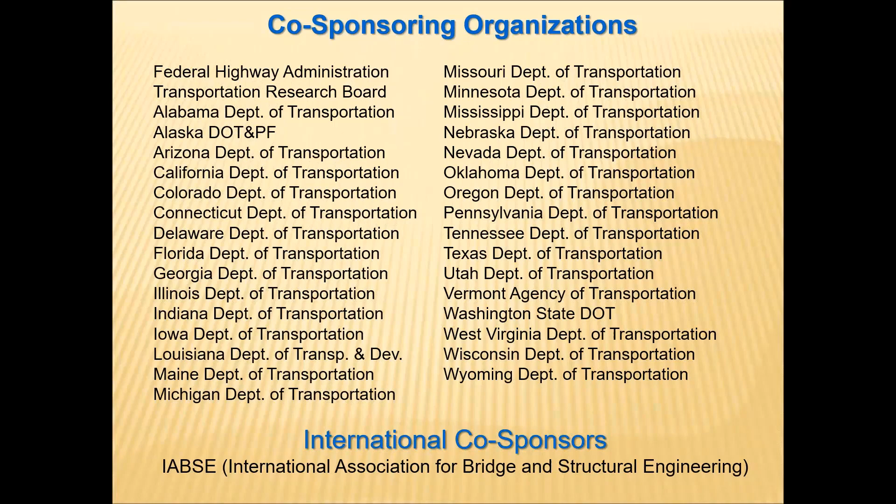This slide shows you the co-sponsoring state DOTs for the conference: 31 state DOTs, FHWA, TRB.

We also have IABSE as a co-sponsor of the conference. We are very delighted to tell you that we have two congressmen who are good friends of bridge engineering and very much involved with transportation, members of the committees on transportation. They're confirmed to be with us, sharing their thoughts and making some remarks during the conference.

The welcoming group also includes Carmen Swanwick, chair of the AASHTO COBS. We are also delighted to have a speaker from the US DOT, Firas Ibrahim, a very good bridge engineer himself, to provide us some of his thoughts on ABC and so on.

We also have several keynote talks with speakers from around the world to provide us with an opportunity to learn from the latest developments in ABC in other countries. You can go to our website and see their names, titles, and affiliations. We have speakers from Switzerland, Sweden, China, Germany, England, and Holland.

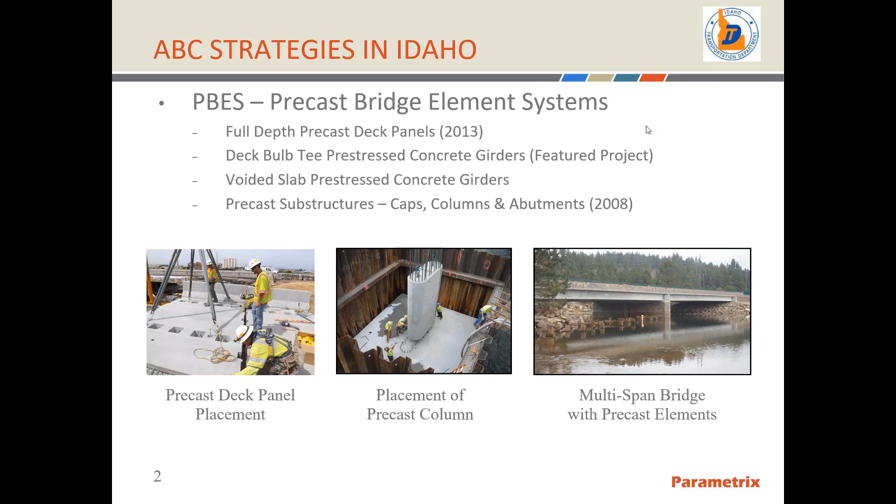In 2014, we did our first bridge slide. That was in a design-build contract, and it was followed up with another bridge slide in 2020 on I-84, which was a design-bid-build contract.

Also in 2013, we utilized full depth deck panels. And finally, we recently piloted a project for construction with the use of steel I-girders with cast in place concrete deck in segments, and those were cast off site, then craned into final position and connected with closure pours.

In summary, Idaho has been using ABC concepts for about 50 projects that we have had underway. And Idaho's use of ABC has been very positive, and we will continue to use ABC as a tool in our toolbox.

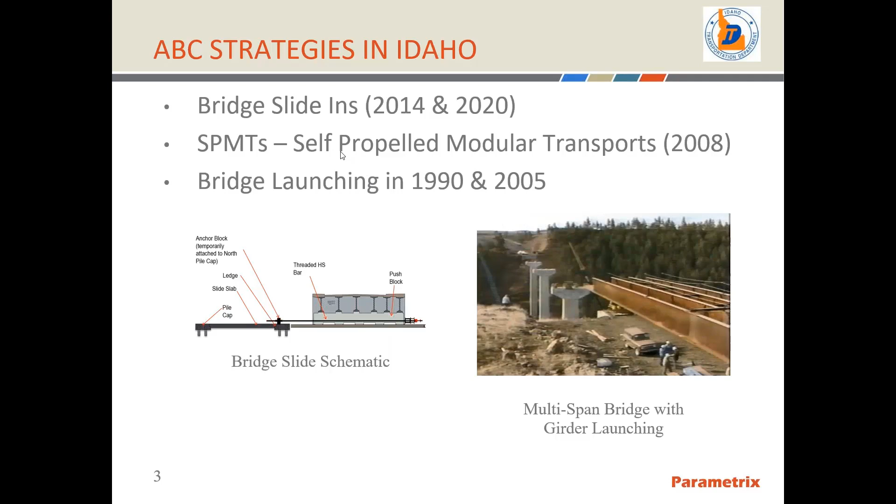Thank you very much, Matt. I'd also like to thank ABC and UTC for this opportunity to present our featured project for today. So today we're talking about the State Highway 51 over Snake River Bridge.

I'll give you a description of the project, design challenges, the solutions to those challenges, some details on the superstructure design and substructure design, and then also what everybody likes to see, the construction.

Contributors for the project included the people you see here. ITD did the majority of the roadway civil design, and also did the early on design, the TS&L, to select the type size bridge replacement that we're going to talk about today. ITD hired Parametrix after they did the TS&L to complete the design and take it all the way through PS&E.

American Geotechnics was the geotechnical engineer providing the foundation design. Forrester and Associates provided hydraulic and scour design. The contractor was Cannon Builders. The precaster was Forterra.

Lafarge Ductal provided the UHPC for the connections. Nucor and Skyline provided the steel pipe piles that we'll be talking about today. HLE was the contractor's engineer who did all of the construction engineering. Western States Rebar provided reinforcement, and of course FlexiFloat, which you'll see their product being used here in the presentation for the barge that was used during construction.

The project was the typical design bid build project with 6 bidders. The low bid came in around 6.8 million, with the high bid coming in around 8.8 million. The contract was set up to have 299 calendar days to complete the work, with liquidated damages of 4,100 per day.

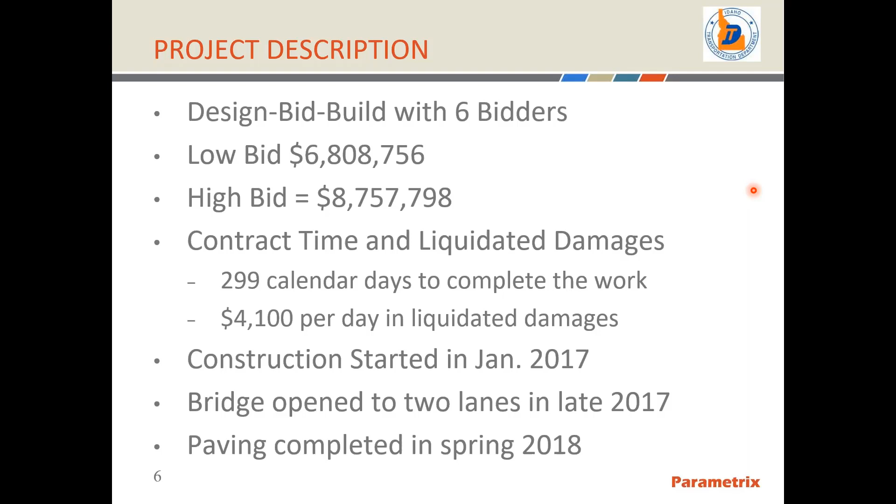Construction started in early January 2017. The bridge was opened to 2 lanes in late 2017, and paving was completed in spring of 2018.

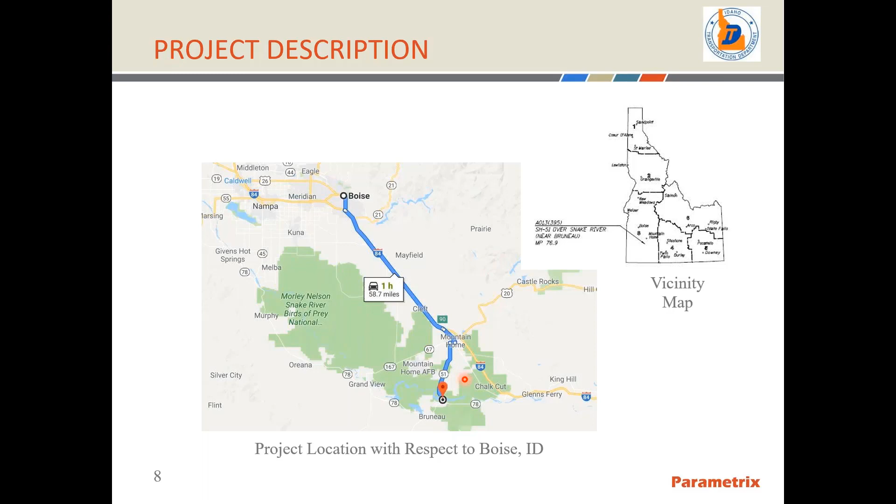The project is located in Idaho. Here's a map of the US, and Idaho is in the Great Northwest. More specifically, we're talking about the southwest corner of Idaho here. From Boise, it's an hour southeast to the project site, heading south on I-84, and then when you get to Mountain Home, you take another south turn on State Highway 51, and eventually you'll get to the project site.

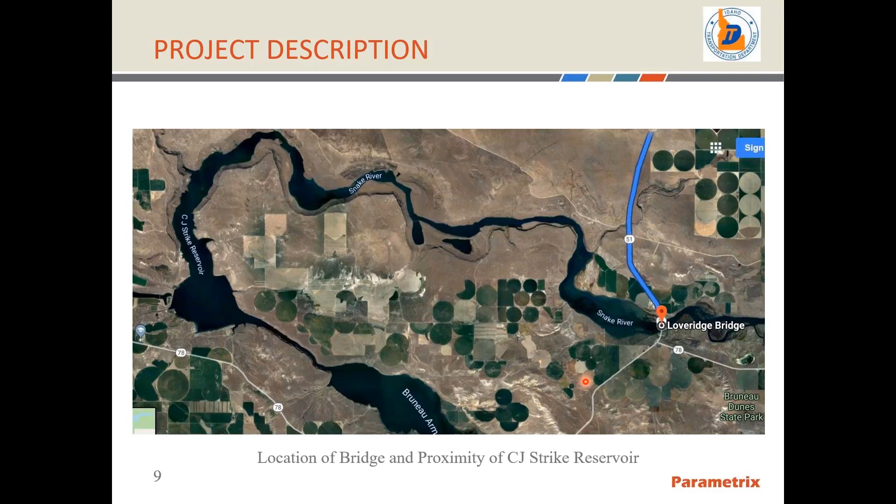In this photo, you can see State Highway 51 runs north-south across the river. This is the Snake River. There's a reservoir here, CJ Strike Reservoir, with the dam right here. The bridge is actually just in the eastern limits of the backwater from the reservoir. Also nearby is the Bruneau Dunes State Park, a great place for recreational people who like to play in dunes. And then, as you can see, lots of agriculture in the area. So State Highway 51 plays a valuable link, especially for agriculture, a lot of the product that needs to get to market.

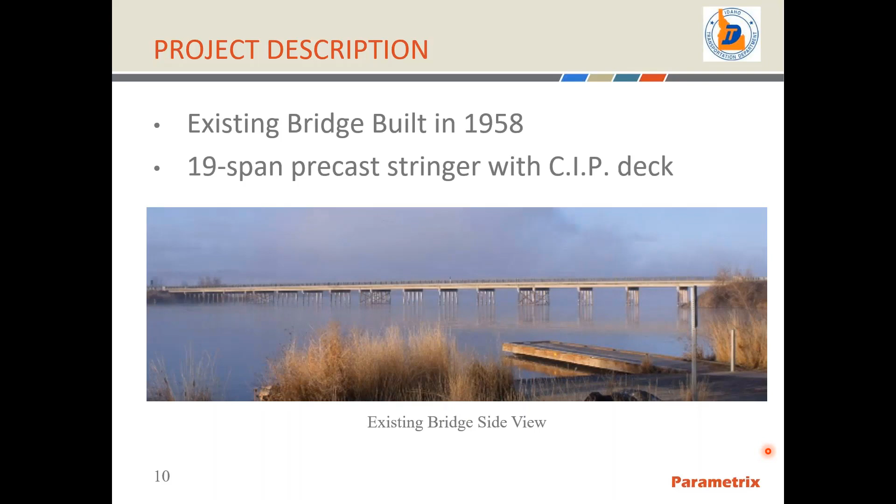The existing bridge was built in 1958. It's a 19-span precast stringer with cast-in-place deck bridge. The substructure consisted of pile bent substructure type, so 4 piles per bent with a cast-in-place cap. And then the deck itself was a two-lane bridge with minimal shoulders and of course substandard rails by today's standards.

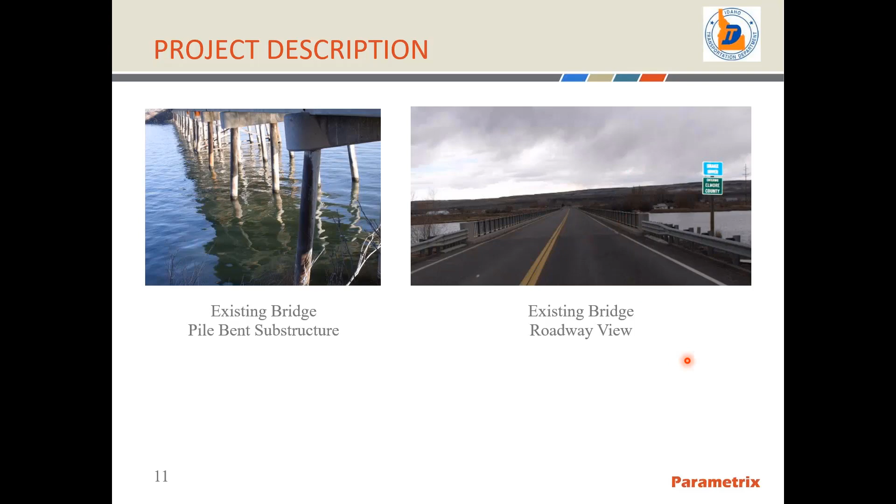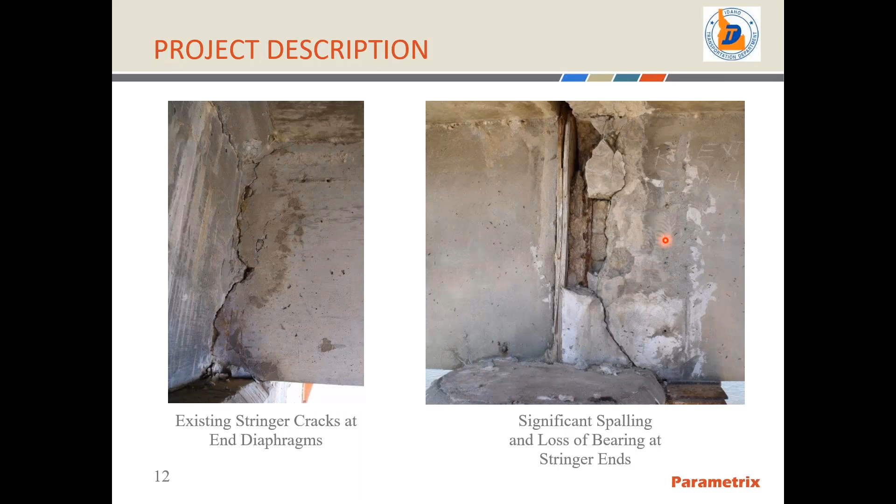Lots of deterioration started to occur over time, including significant spalling at the ends, which was opening up opportunities for corrosion for the reinforcement inside the members. ITD throughout the years had been working to extend the service life of the bridge by installing these steel brackets to the face of the pile caps.

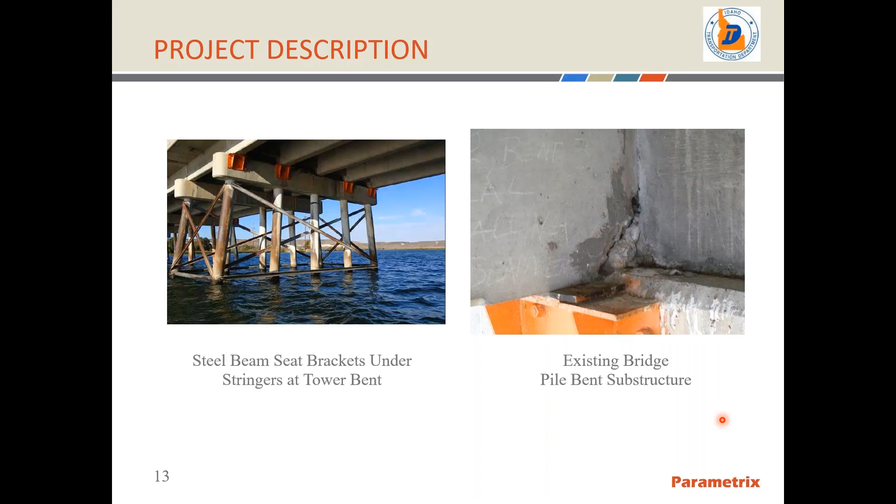On the left-hand side, you can see a location on the existing bridge where there's a tower bent, two bents side by side, and the steel brackets that were being installed to help extend the service life of the bridge. Recent inspections had identified that even the steel brackets were starting to show signs of significant deformation, so ITD made the decision that it was time to go ahead and replace the bridge.

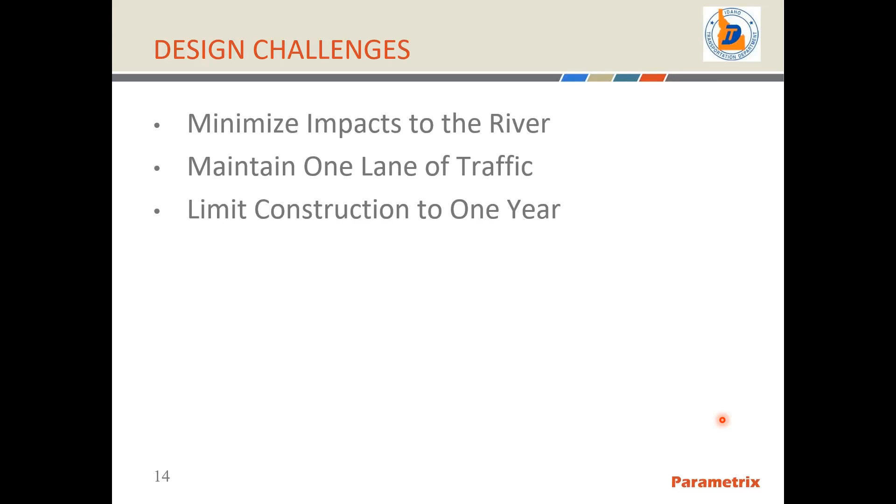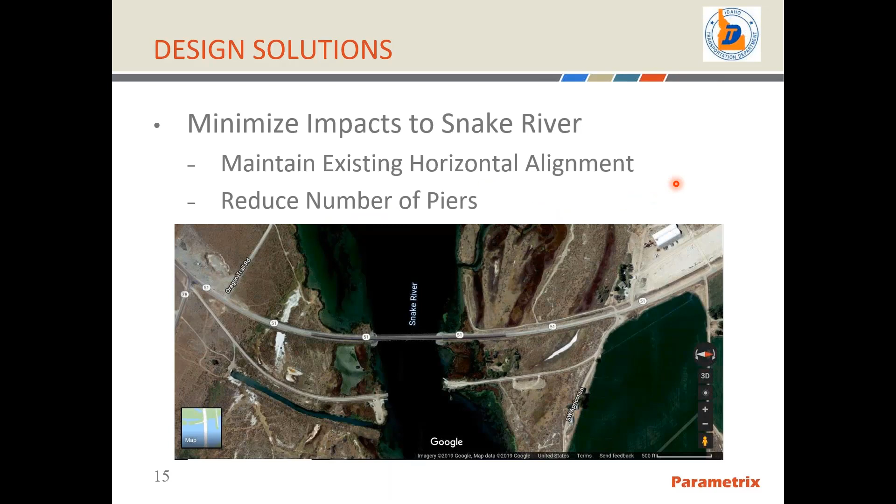The decision was made early on to avoid realigning State Highway 51 and instead utilize stage construction in order to maintain the same horizontal alignment. We also wanted to reduce the number of piers that were going to be installed in the river.

Traffic control was maintained with temporary signals at each end - here's a picture of the temporary signals we used. The traffic volume is not very high, which is why these single-lane closures work like this. The one-directional ADT was 575 with only about 6.7% trucks.

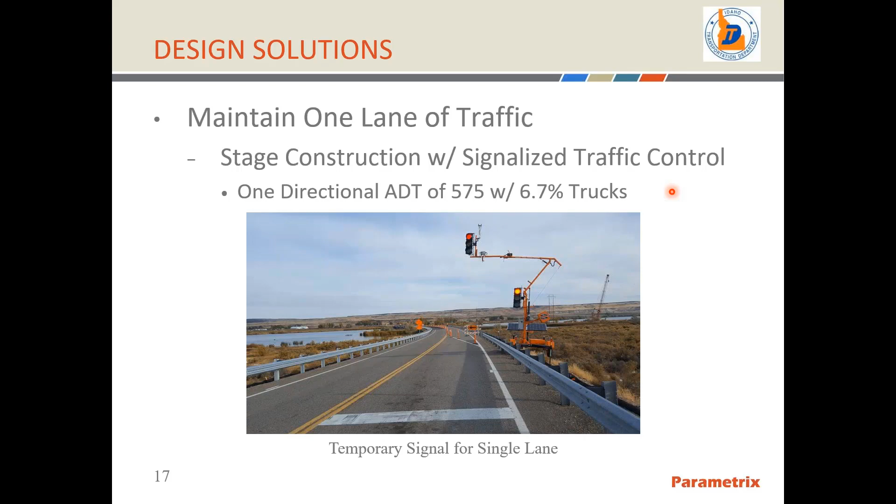To limit construction to a single year, we looked at many options, but settled on utilizing deck bulb T-girders with ultra high performance concrete, providing an asphalt overlay with spray-applied waterproofing membrane, and for the rail, using a two-tube curb mount rail.

In this picture you can see the deck bulb T's, which were connected with ultra high performance concrete between each girder. The overlay shown here varied from 7 inches at the abutments and piers to just a little over 2 inches minimum at midspan. And here's the two-tube curb mount rail.

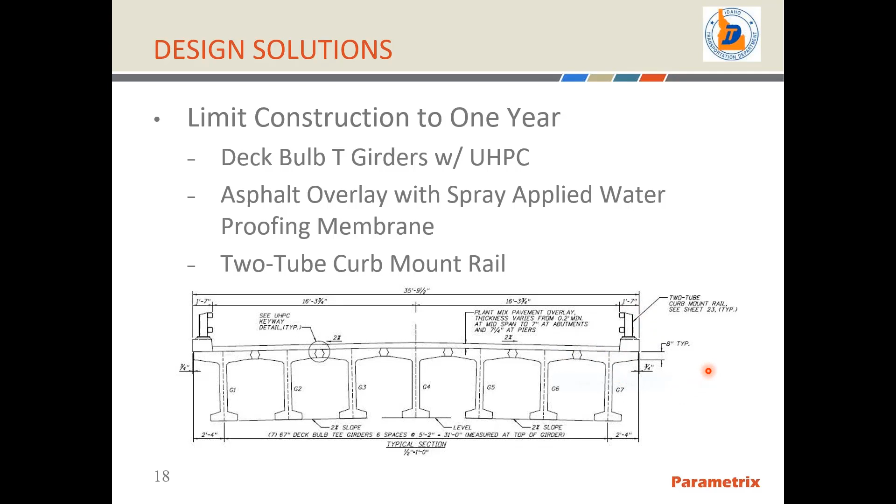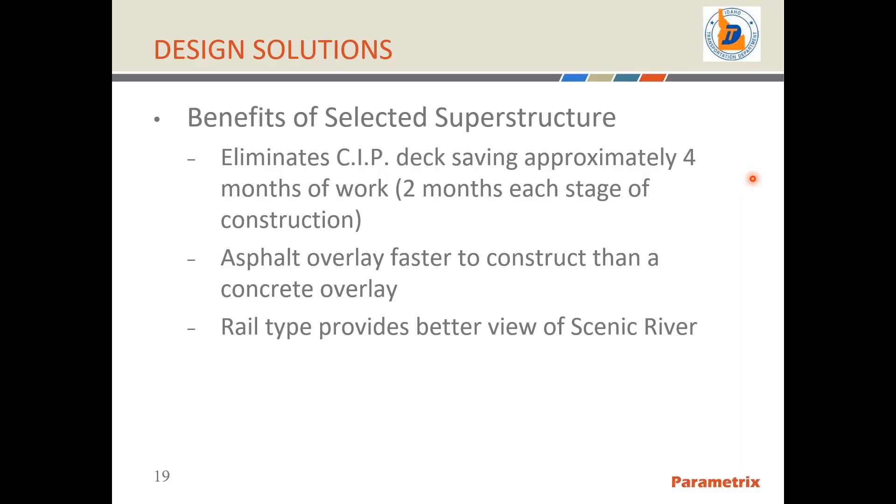Benefits of the selected superstructure were that it eliminated the cast-in-place deck, saving approximately 4 months of work, figuring about 2 months for each stage of construction. The asphalt overlay was also faster to construct than a concrete overlay, and the rail type provides a better view of the scenic river.

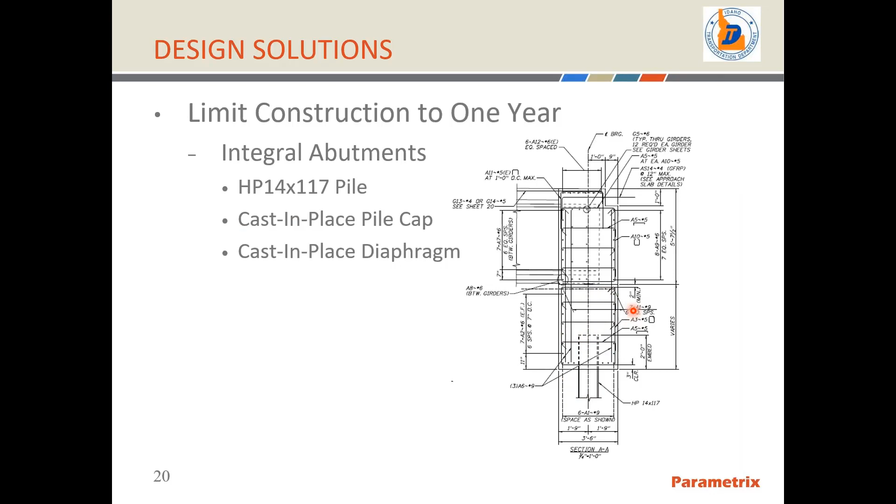Focusing on the substructure and what we could do to help expedite construction - this is a fairly long bridge, so we had to do extensive calculations to make sure integral abutments were appropriate. It was determined they are acceptable for the bridge length, founded on a single row of steel H piles with a cast-in-place pile cap, and the end diaphragm here.

With regard to the piers in the water, we elected to use a cast-in-place cap beam founded on top of pipe piles - 4 piles, 36 inches in diameter, with a 1-inch wall.

Benefits of the selected substructure included a significant reduction in in-water work time. We didn't have coffer dams or drilled shafts, no pile groups with a cast-in-place pile cap to construct, and no cast-in-place or precast columns to construct. It also reduced environmental impacts to the river, had higher reliability for the capacity of steel piles with the use of pile dynamic testing, and ultimately we provided a jointless bridge deck, reducing maintenance costs in the long run.

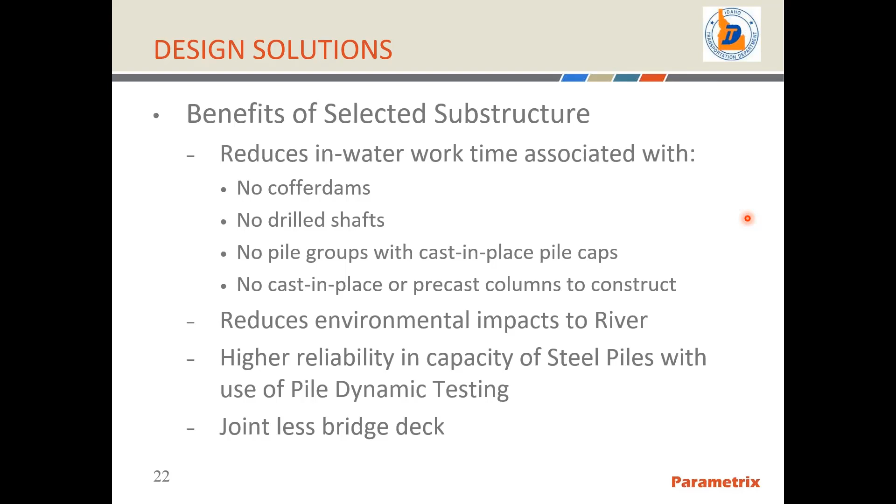More specifically about the superstructure design, the precast girders themselves were connected with ultra high performance concrete. Most of us listening to these webinars have heard about ultra high performance concrete before, but there may be some new to bridge engineering who haven't, so I'll talk a little bit about it. All the design was completed using this tech note, Design and Construction of Field Cast Ultra High Performance Concrete Connections.

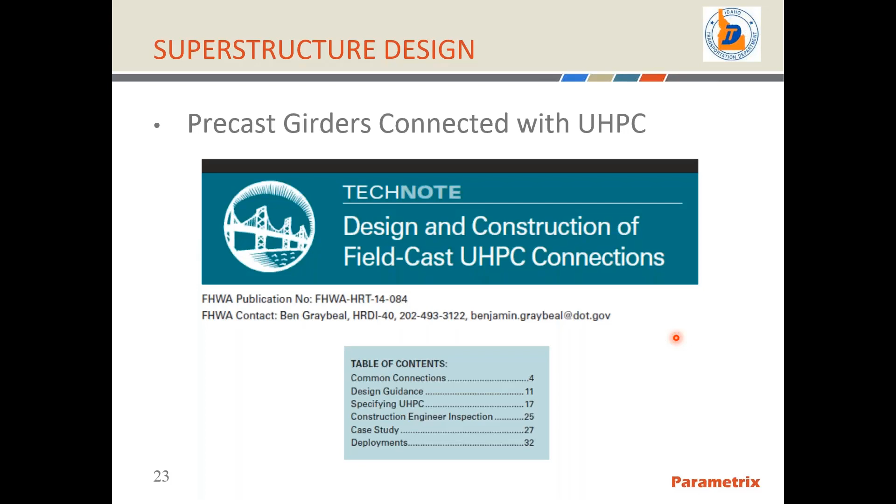It's an FHWA publication, the publication number is there for you, and FHWA's contact is Ben Graybeal, who really authored this publication. He's a great resource if anybody's interested in learning more about it. I highly recommend you pick up this tech note and read through it, and if you've got questions, give Ben a call. I personally called him twice during the design of this project just to get confirmation of the information and make sure I was applying things correctly.

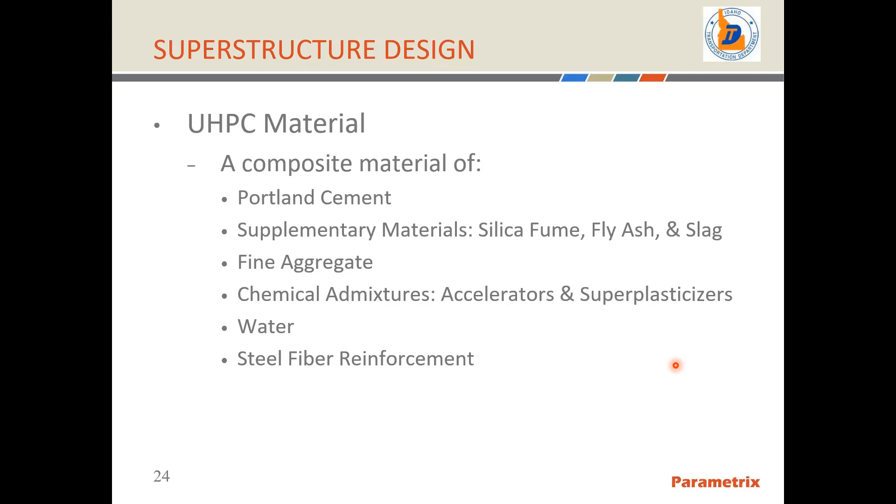Ultra high performance concrete is really a composite material. It includes Portland cement and supplementary materials like silica fume, fly ash, or slag. It uses fine aggregate, not coarse aggregate, and has chemical admixtures like accelerators and superplasticizers. Of course it uses water, and another key ingredient is the steel fiber reinforcement, typically about 2% by volume, consisting of little half-inch steel fibers that are about 8/1000ths of an inch in diameter.

So why did we elect to use ultra high performance concrete for the girder flange connection on this project? Well, it has a high tensile strength. It's self-consolidating, so it's easy to flow into the keyways and around the reinforcement. It bonds well to the precast surfaces when prepped accordingly. It has high durability and low porosity, which is good for our freeze-thaw conditions. And it has a short development and lap splice length, which is really beneficial.

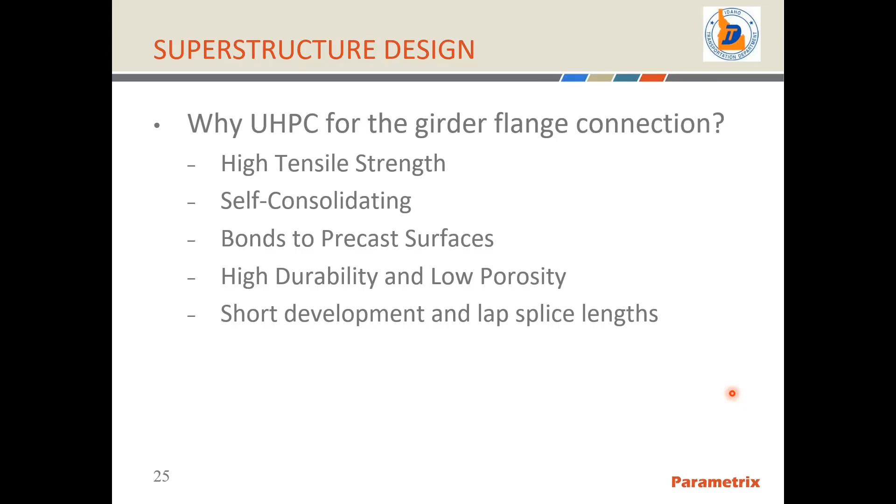In particular, the reinforcement lap splice information for lap splice and development length in ultra high performance concrete is provided here. Depending on your cover requirements, your development length is anywhere between 8 and 10 bar diameters. The more unusual piece, I think, when people first start working with this, is that the lap splice length is only 75% of the bar development length. For us in bridge engineering, or concrete design generally, that's unusual to hear, that your lap splice length is shorter than your development length. What we typically see using regular reinforcement and regular concrete is our lap splice length is about 30% longer than our development length in today's codes.

This was one area where I actually contacted Ben Graybeal to ask for clarification, to make sure I was understanding the information correctly in the tech note. Ben assured me I was interpreting it correctly, that there's been plenty of research done to show that the bars, when tested, actually break inside the precast and not inside the ultra high performance concrete. He's got lots of data to support these recommendations, so we followed them.

For our particular project, the way we connected our girders together at the keyways, we used a 6-inch wide keyway that accommodated a 4-inch non-contact lap splice. All of the reinforcement in the flange was epoxy coated reinforcement. The top mat were number 5 bars and the bottom mat were number 4 bars.

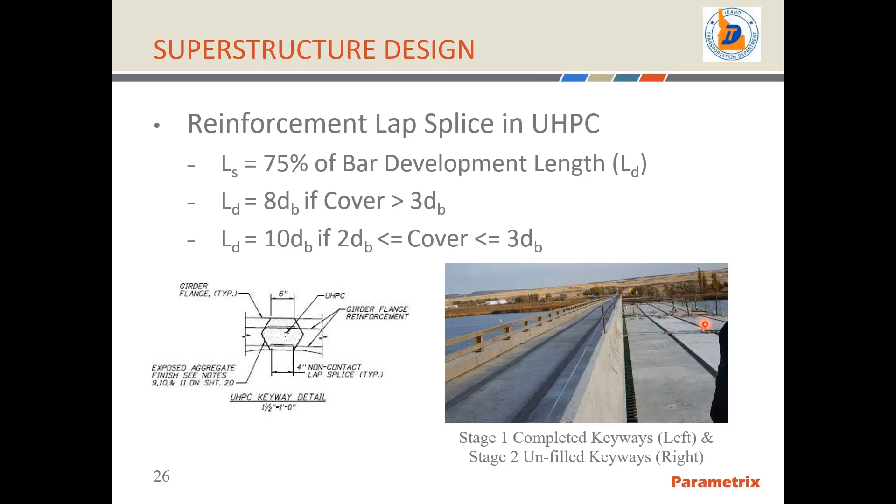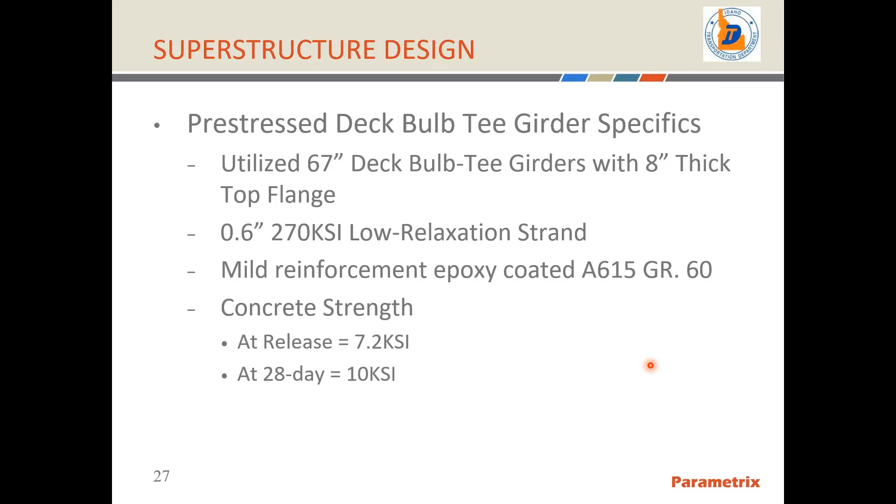More specifically about the pre-stressed deck bulb T-girder design, we utilized 67-inch deep deck bulb T-girders with an 8-inch thick top flange. It used 6/10, 270 KSI low relaxation strand. All other reinforcement was A615 grade 60, and the concrete at release was 7.2 KSI, and at 28 days 10 KSI. The girders were designed as simple span beams with mild reinforcement in the top flange to control cracking at the piers. Dead loads were applied prior to the UHPC keyways, distributed based on tributary area to the girders—basically anything that would be on a conventional non-composite or composite deck girder system; anything non-composite went tributary to the girders.

Similarly, we treated all loads that were applied after the UHPC keyway was installed and cured. We distributed all dead loads equally to the girders.

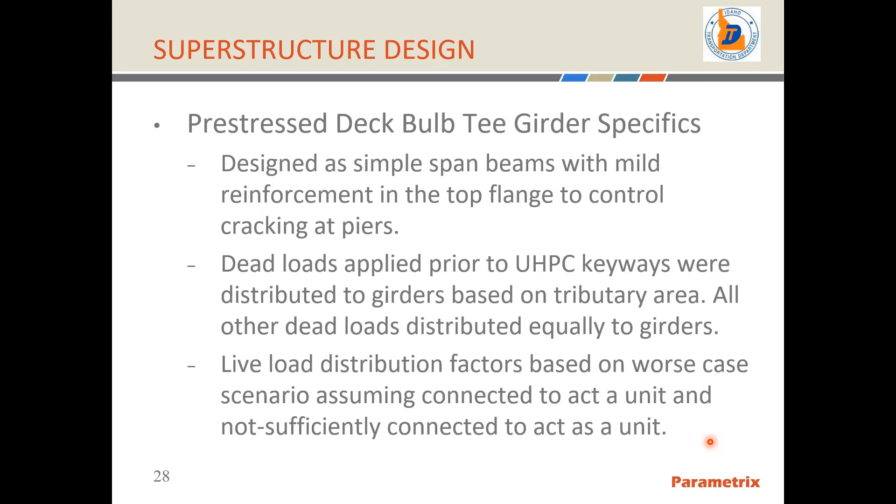Our live load distribution factors, because this is new technology being used, aren't clearly or specifically addressed in the AASHTO LRFD bridge design specifications at this time on what distribution factor to use. So we elected to use the worst case scenario, assuming the girders are connected to act as a unit, and also not sufficiently connected to act as a unit, so we could bracket the range of possibility and make sure we're not light anywhere.

More specifically about the connection over the piers, the reinforcement was really designed to control cracking over the piers. Our top flange reinforcement consisted of number 7s in the top and bottom mat of the girder. These number 7s from the left and right side of the pier were staggered to avoid each other and have a non-contact lap splice right over the pier.

The reinforcement was designed to control cracking over the pier, so it was checked for the service 1 limit state and not the strength limit state. The girders were designed as simply supported for the strength limit state and service limit state, but also checked at the service limit state to control cracking over the pier.

Furthermore, to connect the superstructure to the substructure, we provided dowels that ran down the centerline of the pier, connecting these two along with a keyway - a pretty common detail used in Idaho.

Location of the bents was also a critical feature for this. The existing bridge was composed of 19 spans, but 3 of those spans are really short spans in these locations that actually produce what's called a tower bent - at least that's how it's identified in the existing plans.

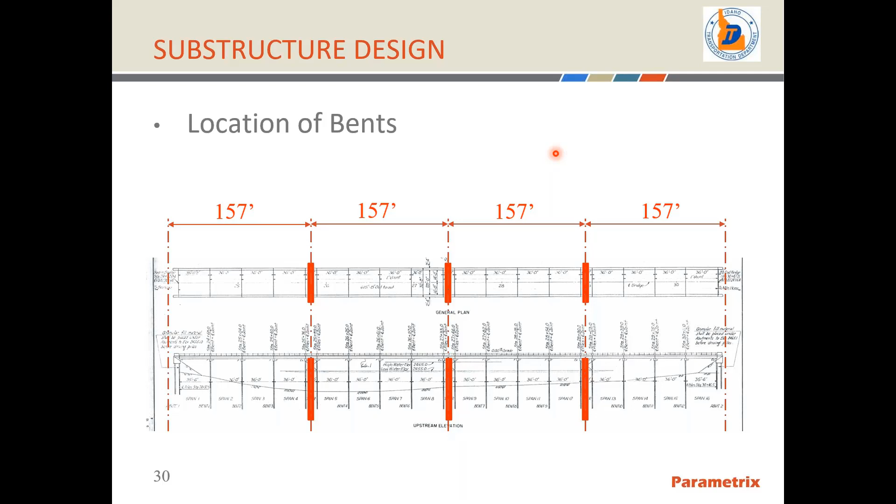So the tower bent with those short spans became an ideal location to place our new piers, shown in red. The piers were spaced right between those tower bents, with the thought that the contractor could use the existing bridge to mobilize out on, remove the short span, drive his pile, and then work back off the bridge deck. And that's exactly what the contractor elected to do during construction.

Another benefit of selecting this location and making use of the tower bents is the contractor was able to use a steel template to ensure correct alignment for his piles while driving through this water column and down into the stream bed mud. The contractor made great use of the existing bridge to facilitate his tolerances and placement of the piles.

More about the pier bent piles themselves - for the foundation, it was decided, working with American Geotechnics, the geotechnical engineer, to use 36-inch pipe piles. It's really called a composite pile in the geotechnical world, at least what I learned for the first time on this project, because it's driven as an open-ended pile in the beginning.

So the pile at the tip has no closure plate. It was driven open-ended for the first 55 or 60 feet, depending on the pier, and then a closure plate was installed in the pile. This closure plate, once in contact with the pile, forced a situation where the pile was plugged and you had an end-bearing pile.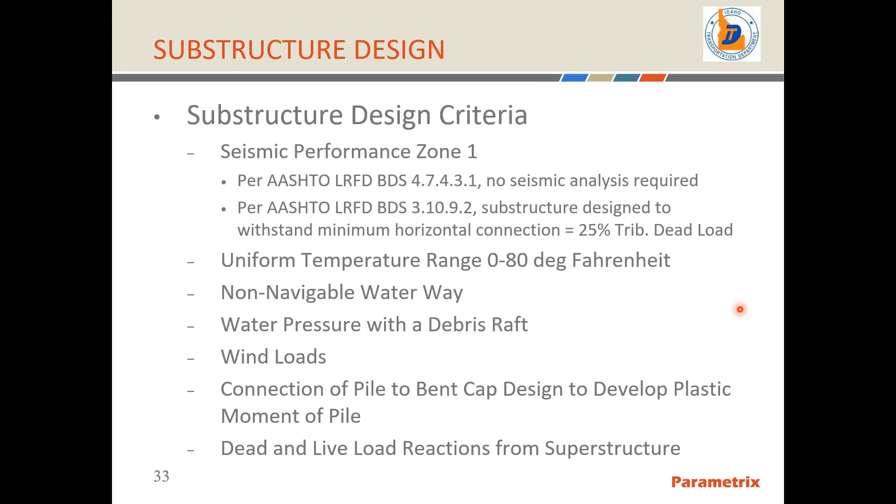So in order to get full plastic moment capacity of that pile inside our bent cap, we designed a very robust group of reinforcement that confined the concrete around the pile. What you see in these red lines are actually U-shaped bars crisscrossing across the pile in opposite directions. And these green shaped bars, kind of like a top hat bar, help to transfer all axial load into the cap beam.

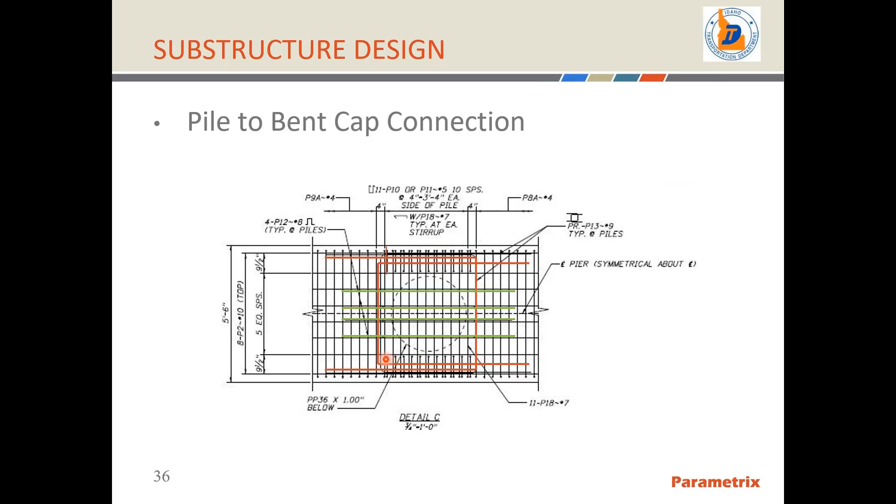Another view here to help see it: in this section on the right hand side, you can see our red bars, which I'm highlighting in red. These were again those opposing U-shaped bars, and we also had the additional number 8 top hat bars, as I like to refer to them. In plan view, to help see the whole picture, here are those U bars tied in, and of course the top hat bars right there.

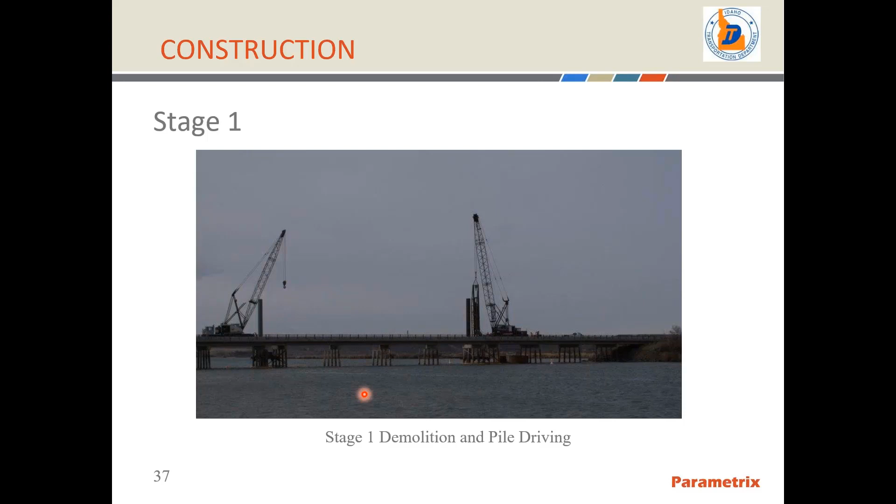Beyond design, let's talk a little about the construction. The contractor started with stage 1 construction, demoing out the short tower span, and then demoing out part of the bridge itself. He worked with 2 cranes, as you can see in this picture. On the right hand side, the contractor's crane is mobilized with a hammer, driving pile. On the left hand side, you can see a pile sticking up in the air, waiting to be driven down. The contractor worked back and forth this way on the existing bridge while traffic was on the other side during stage 1.

Here's another picture of the pile driving that was done by the contractor. As you can see here, this beam has a steel bracket. As we mentioned, the bridge was being replaced because there was some deterioration at the ends of the beams that were causing issues with bearing.

As part of the construction, we required the contractor, if he mobilized construction equipment out there, to provide design calculations showing the beam can handle it with the existing brackets that were supporting the beams, since construction loads are often heavier than highway loads.

During design, we did a load rating of the bridge to verify that the stage 1 situation, with reduced number of stringers, was satisfied with the additional weight of the temporary barrier that was installed. The load rating was acceptable for highway loads, but for construction loads being much higher, it was not acceptable.

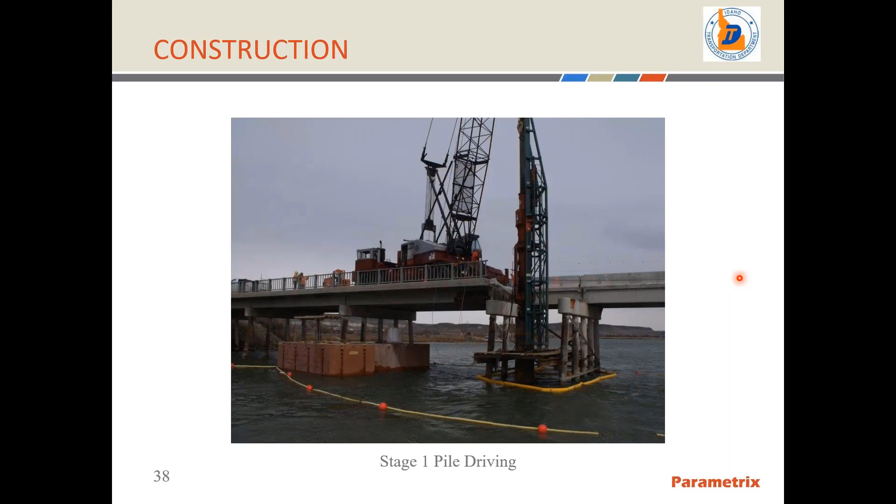So the contractor had to do extra work to design this little bracket, and he applied it anywhere there were signs of deterioration on the bridge where these brackets were installed by ITD to help extend the service life of the bridge. It worked very well, and it made it possible for the contractor to use the existing bridge for construction while driving these piles.

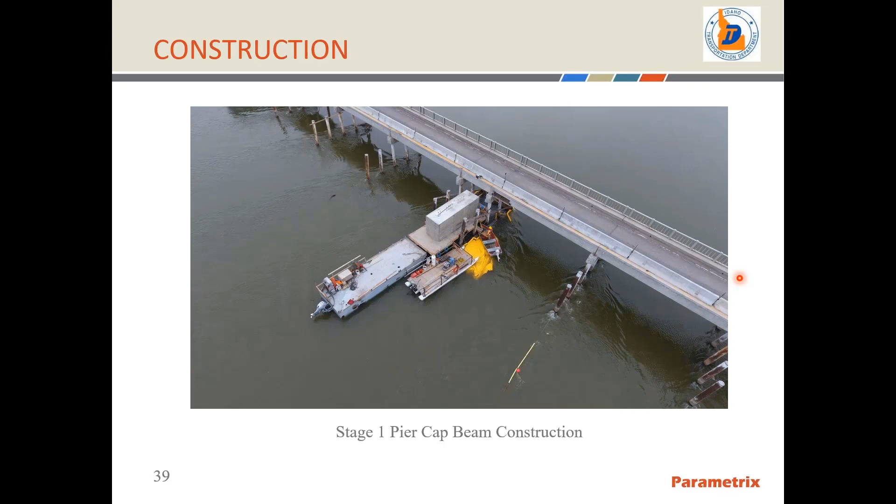Here's a picture again of stage 1 construction showing the cast-in-place cap complete after the pile driving was done. You can see dowels sticking out to make the connection to the superstructure.

In this picture, after the pier caps are done and the abutment was complete at the ends, the contractor mobilized his crane out onto a barge. In fact, all construction was performed for this bridge working off of barges. No temporary structures, like a temporary platform with piles driven into the river, were utilized. All work was performed off of barges.

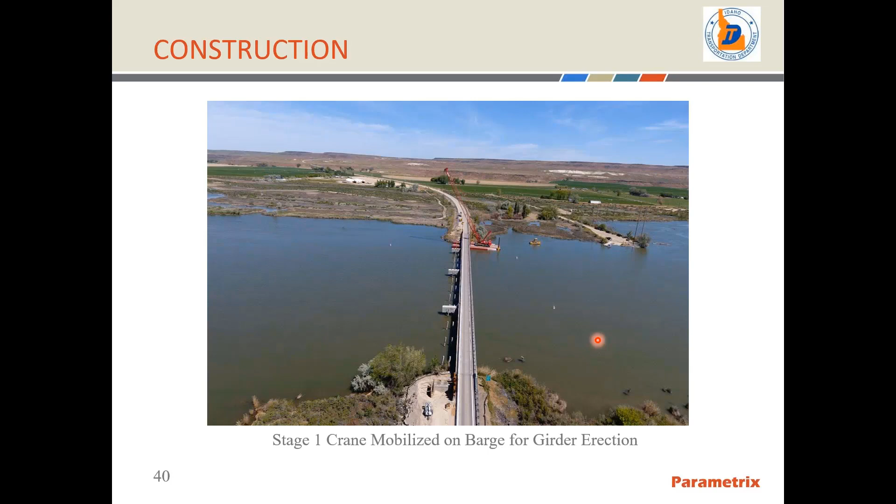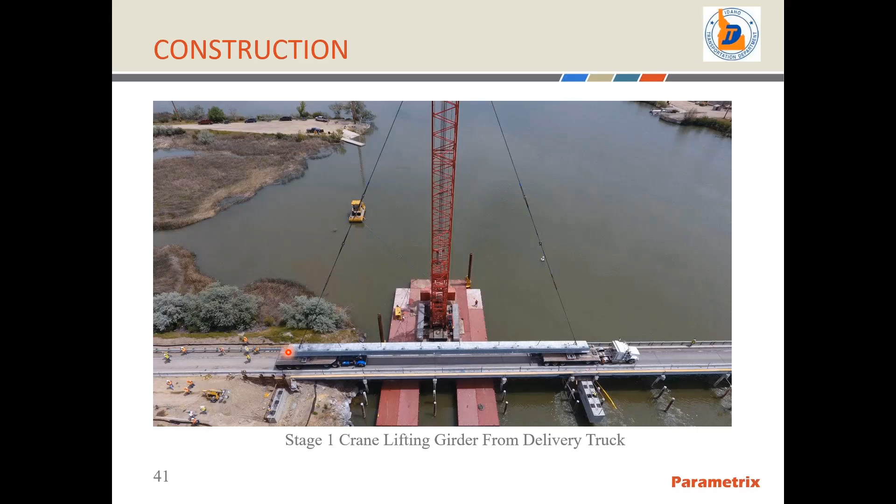So the contractor, when ready to erect his girders, mobilized his crane in, as you see here in the picture. Then the truck comes in. He connects his crane leads up to the pick points on the girder, using a single crane to pick this large girder, and then proceeds with the girder erection as you see here.

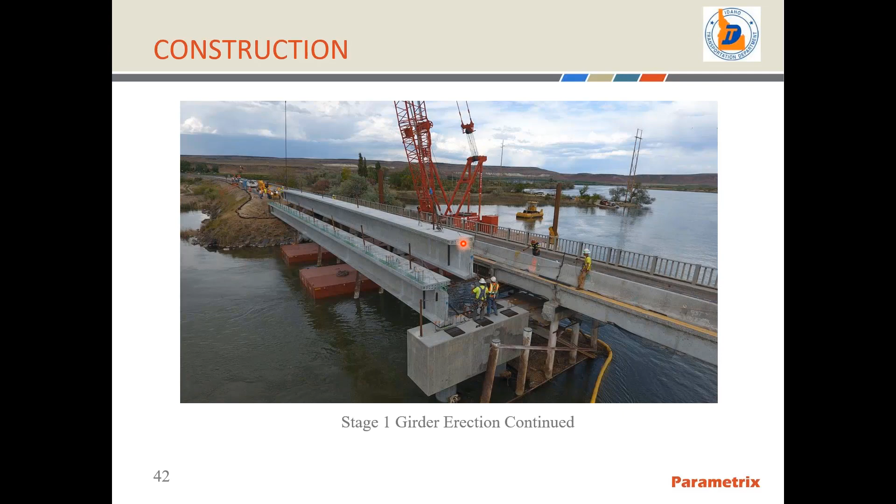So what you see here is stage 1. The first girder is erected, the exterior girder. Now this first interior girder is coming to land on the bearing pad.

Once the girders were erected, the contractor was ready to start installing the ultra high performance concrete. Here's a picture of the equipment that was used to place the UHPC. All batching of this material was done on site.

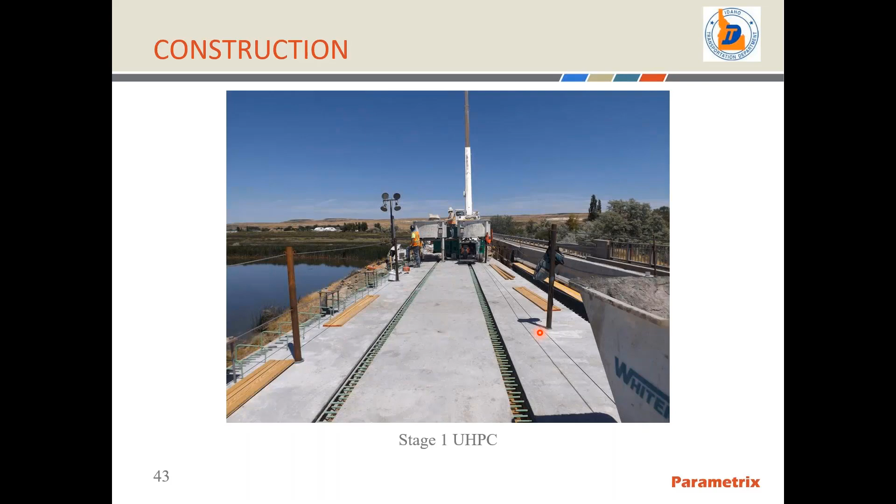Here's some more pictures about the UHPC placement. In order to place this material, the contractor has to form on the bottom side, but also has to put a form on the top side, because this material is so flowable with the superplasticizers and additives in it that once it starts flowing, it flows really well. In fact, it actually flows up and out of the form, especially in low spots.

Pre-stressed girders tend to camber up, so the ends of the girders would be the low spots, and this material really would start to flow out of it. Plus, the specifications for the project required that the UHPC flow about a quarter of an inch up out of the joint, and then the contractor has to grind the joint flush with the deck after it's cured.

In this picture, you see the crews installing the forms across the top. And in this picture, you can see the material flowing as it's being placed.

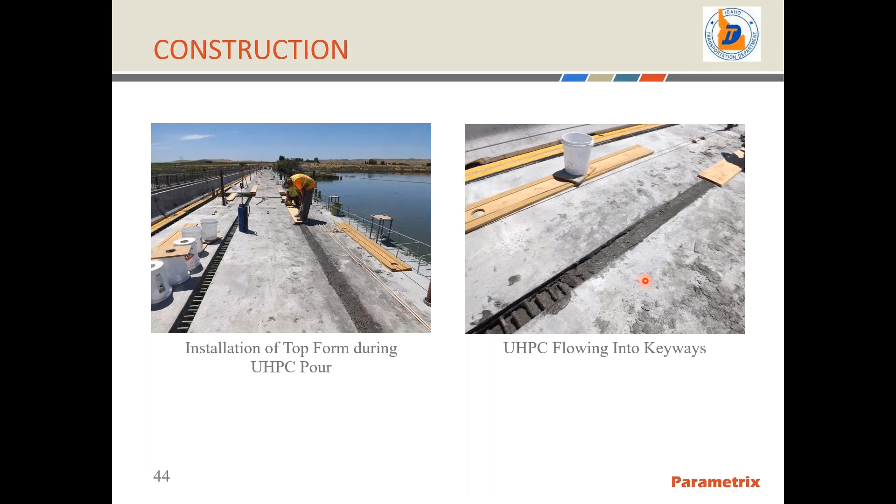The apparatus used for pouring the UHPC was pretty simple. They referred to it as the bucket on site, so it was pretty easy to place the material. They mix it and place it in here, making sure it flows directly into the keyway. You can also see in the picture, again, the epoxy coated reinforcement.

The prepped keyway might be hard to see, but there is an exposed aggregate finish on the keyway, and the material's flowing. They need to get some more in here soon, though.

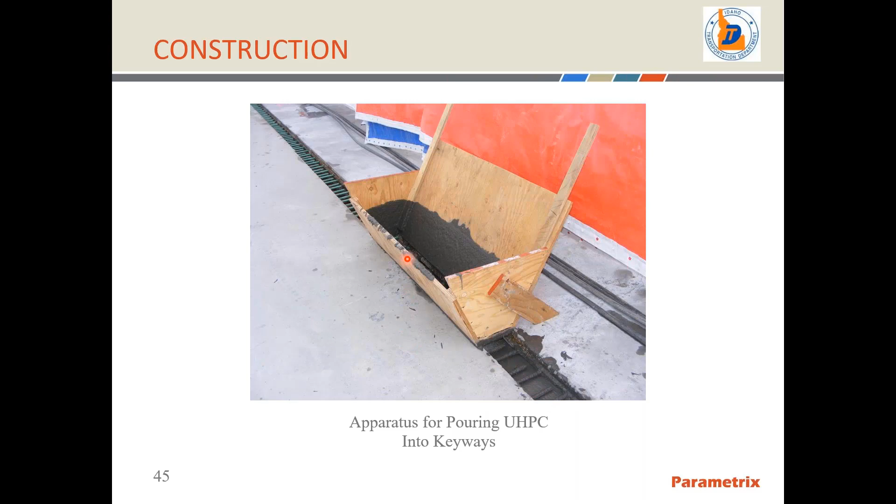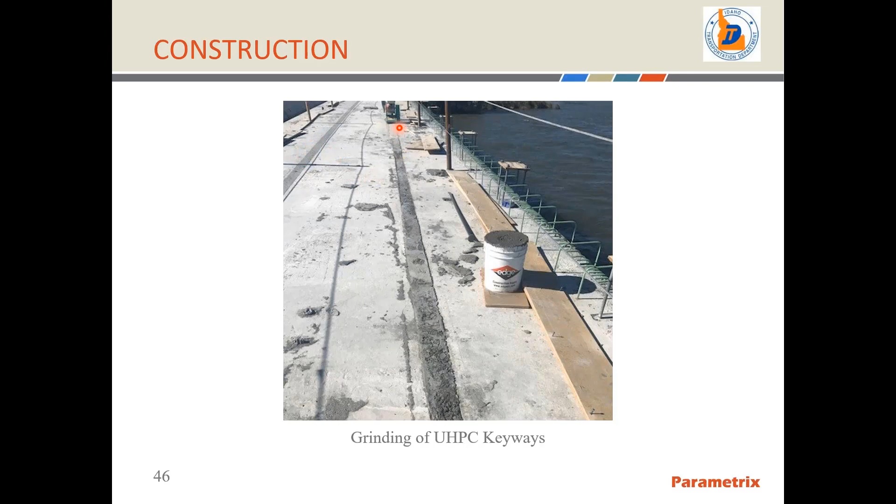After the keyways were poured, the contractor then had to grind the keyways, as I mentioned before. So what you see here on the left-hand side is this keyway has already been ground flush with the adjacent girder flanges, and this keyway grinding is taking place as we see right here. So stage 1 is complete in this picture.

On the left-hand side, there's the 2-tube curb mount rail, the keyways, and the girders and the temporary barrier. On the right-hand side in the picture, you see stage 2 construction in progress. The contractor's got his dual cranes out there, and equipment out there.

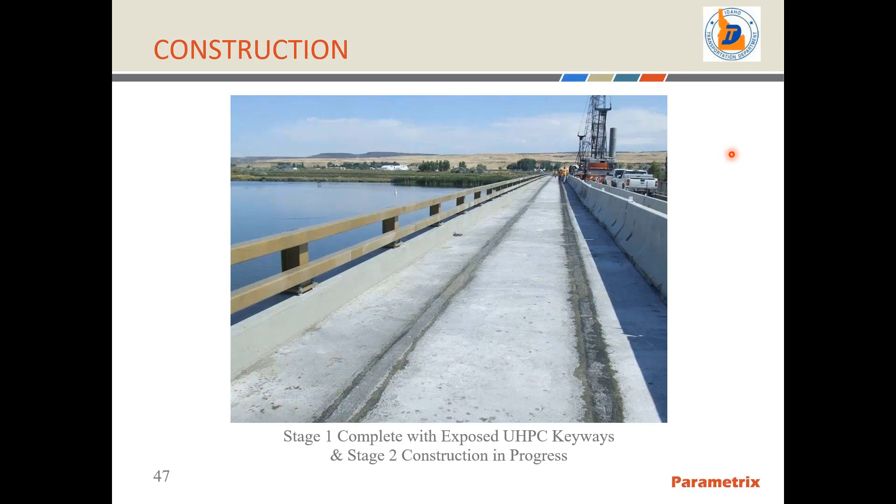You can see a pile up in the air right here as he's working to drive his pile and demo out the bridge, working back from center. Here's a picture of stage 2 demolition, the contractor's crane on the existing bridge picking the rail right now.

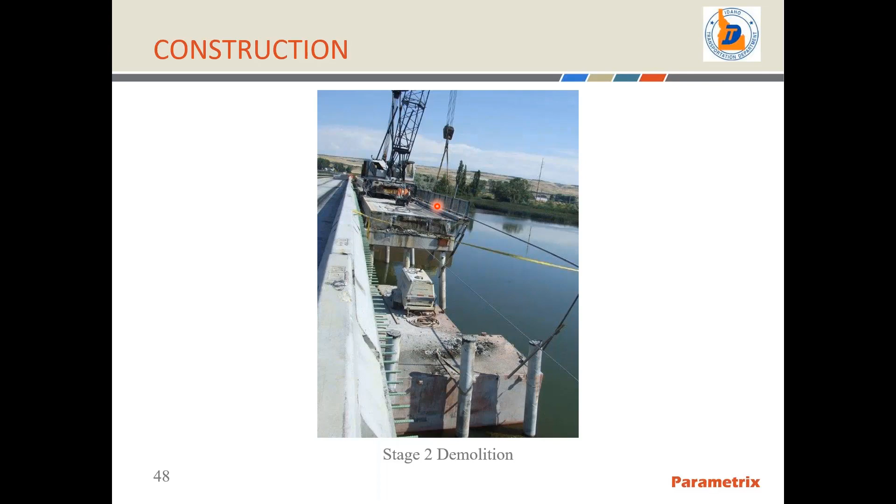Again, work being done off barges. And then stage 2 construction really proceeded along the same lines as stage 1: drive your piles, construct your caps, place your girders, do your intermediate diaphragms, and then do your UHPC keyways.

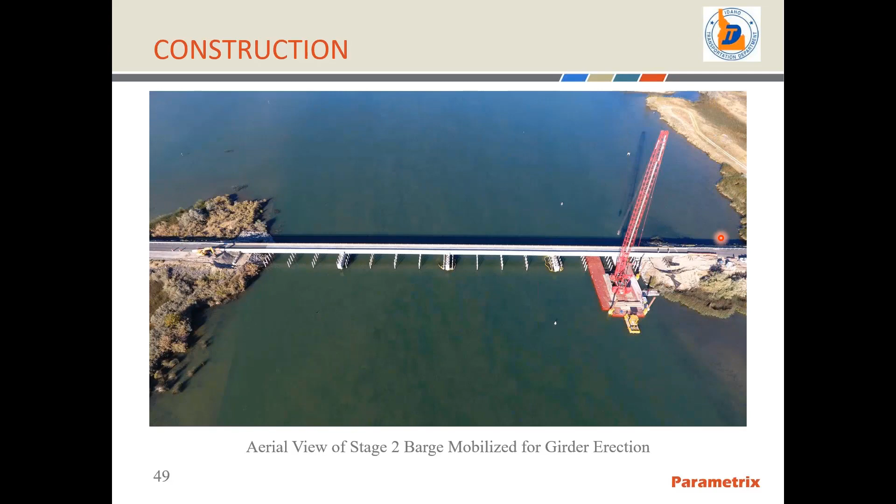So here you see an aerial view of stage 2 with the barge mobilized and ready for the girder erection already. Stage 2 girder erection proceeding.

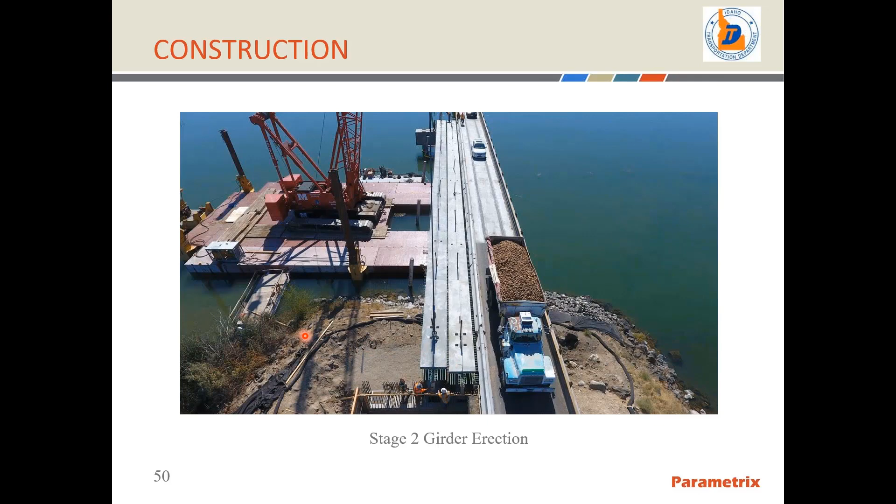As I mentioned, lots of agricultural product comes out of the region here, so you see, I believe these are Idaho's famous potatoes crossing the bridge. And of course, the first 2 girder lines are installed and crews sitting there waiting to make sure that the girders land on the bearings correctly.

Some of the key things about these ultra high performance concrete keyways: because there's tight tolerances on the lap splice length, we're only asking for a 4-inch lap splice length, but you have to have some good control over tolerances. These girders, pre-stress girders, naturally have a sweep in them, and the tolerable sweep is usually around 1/8 of an inch per 10 feet. Now these girder span lengths were around 157 feet, so you're talking almost 2 inches of sweep that could have been allowed in a girder per tolerance from PCI.

But that wouldn't have been acceptable with these keyways, because these keyways are only 6 inches wide, and we have a non-contact lap splice of 4 inches. So the contract plans actually required the contractor to provide a method to correct girder sweep.

In addition, the contract plans also required the contractor to provide a method to correct differential camber between the girders, especially since these keyways are going to be ground flush with the adjacent girder flanges after they're poured with the UHPC keyway. We wanted to make sure everything was leveled up transversely and everything was spaced accordingly for the keyways to get the required non-contact lap of 4 inches for the reinforcement.

So the contractor utilized a come-along system to correct the girder sweep, and some wood spacers that were cut to be 6 inches wide, so that when he pulled the girders together with the come-along, he made sure that he didn't go too much, and he came right to the exact spacing of 6 inches. The system worked really well. I was really happy with it.

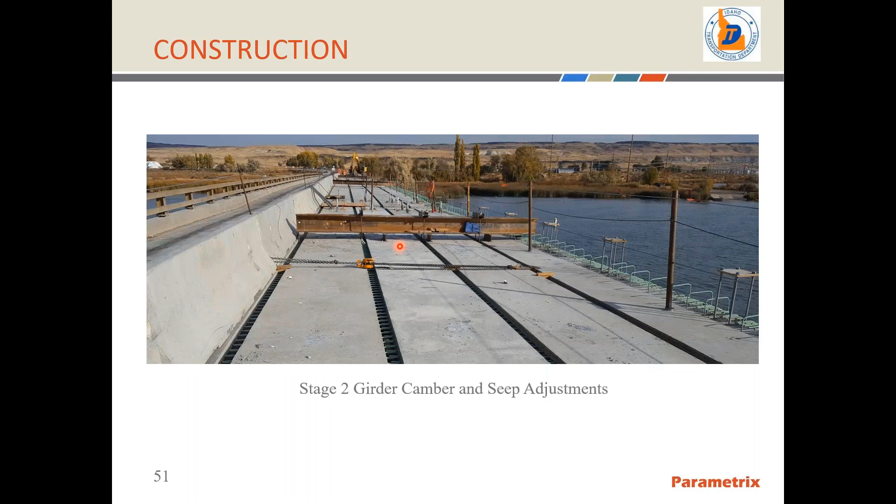To correct the girder camber, the contractor utilized some strong backs, steel beams on the top and bottom below the beams, and just some simple tie rods to go through the girder flange between the keyways, between the girder flanges, and then he just tightened those up so that he could suck the girders together and come into alignment.

So the bridge is complete. This is a picture of a side view from the north bank.

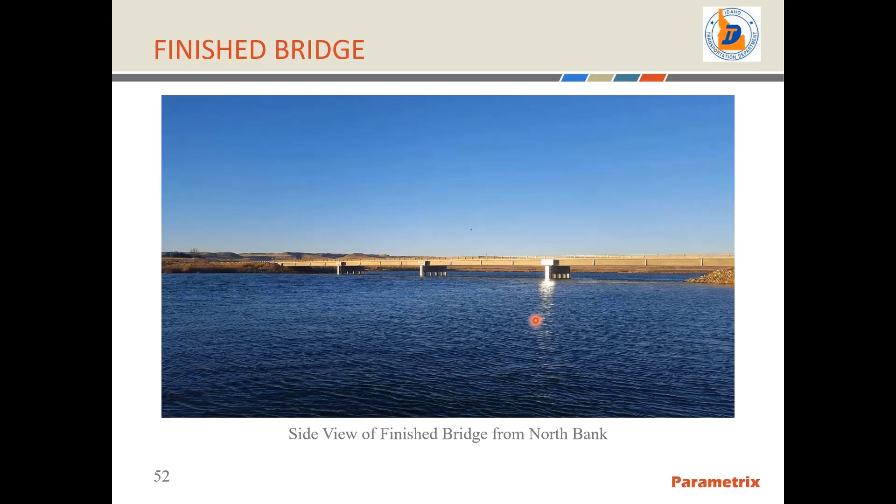As you can see here, all the existing piles have been removed. It's a nice 4-span bridge that's been opened up for the boaters. One might ask, what are these things on the ends of the bridge here, on the ends of the piers? Well, they're actually vertical gauge signs.

They inform the boaters of the low clearance underneath the bridge. This project was a little unique because we typically have to raise the profile of bridges to provide vertical clearance, but because this river is non-navigable, there was no vertical clearance requirement. However, it is a boater friendly site, and a lot of boaters come out here to enjoy the facility. So there was a small profile shift, and a small drop in vertical clearance compared to the existing bridge. Not significant, but enough that the Coast Guard still wanted us to sign the bridge for the vertical clearance, to inform boaters of the low chord clearance underneath the bridge.

So some lessons learned: one of the things that happened during construction was forms needed to be secured tightly. There was one instance where material blew out, but it got corrected quickly. You need to keep good head pressure on the bucket to ensure full placement of the UHPC in the keyway. There was a place where it ended up a little low and didn't reach the quarter inch over the top of the flange.

Experience helps to ensure a timely execution of work. This is a new construction method being used. It's not brand new, but it's new to many contractors, so there's always a learning curve. And of course, the UHPC material actually costs money, so you want to detail to minimize how much of it you're using, which is why we focused a lot on the width of the keyways.

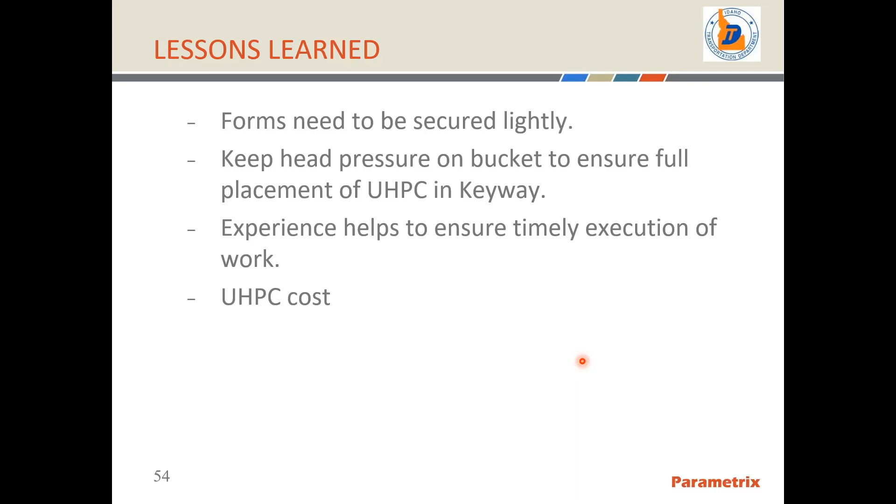That was really a good presentation. We do have a number of questions that came in before the presentation, and some that came in during the presentation, so we'll go ahead and get into that. The questions have been broken into design questions, construction questions, and maybe a cost question. The first question is: can you define the decision-making process, guidelines, cost estimates, and comparison scoring metrics used to reach an ABC recommendation?

Yeah, Paul, this is Matt. I'll take that question. That's a very interesting question, a very good question. We have considered establishing guidelines for the use of ABC, but Idaho is a fairly small state with fairly low ADTs generally throughout the state, so traffic is not really driving our decision-making process. Speed of construction and shortening detours, those really drive what we're trying to accomplish.

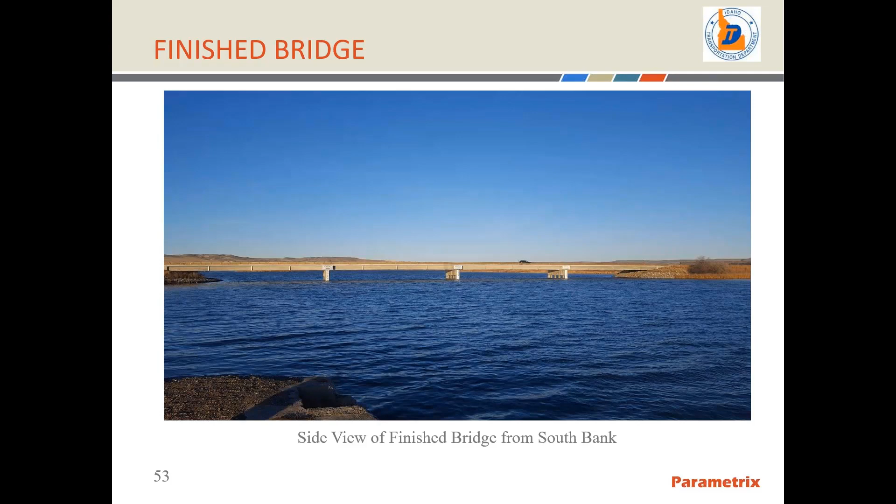A question came in during the presentation: did you take any steps to limit differential deflections or vibrations between the two separate structures while the UHPC cured in the closure pour? That's a very good question, thanks for asking. Yes, there were some measures we tried to take.

In the stage construction, for stage one, three girders were carrying the live load. The reason we shifted the traffic a third time was to try to minimize the vibrations. What we did was require the contractor to install the intermediate diaphragms between the girders, which we didn't talk about much in the presentation.

After they erected the girders, they did the girder camber equalization and corrected for the sweep. The contractor then installed his permanent intermediate diaphragms between all the girders, which helped lock the girders in. He poured his keyway, then shifted traffic over. We were trying to get as many girders as possible participating so we don't have as much differential vibration between the two stages. That was the best we could really do.

Leave that slide up. There were some questions about the overhang: how was the overhang designed, and is the barrier wall integral with the exterior beam with the TL rating?

This is a 2-tube curb mount rail. The overhang for the girder was designed to accommodate, because it's a 2-tube curb mount rail, the full plastic moment of the post itself, and the lateral load applied at the top rail in accordance with the AASHTO LRFD bridge design specifications. The reinforcement was designed pretty much just like a regular conventional overhang for these girders.

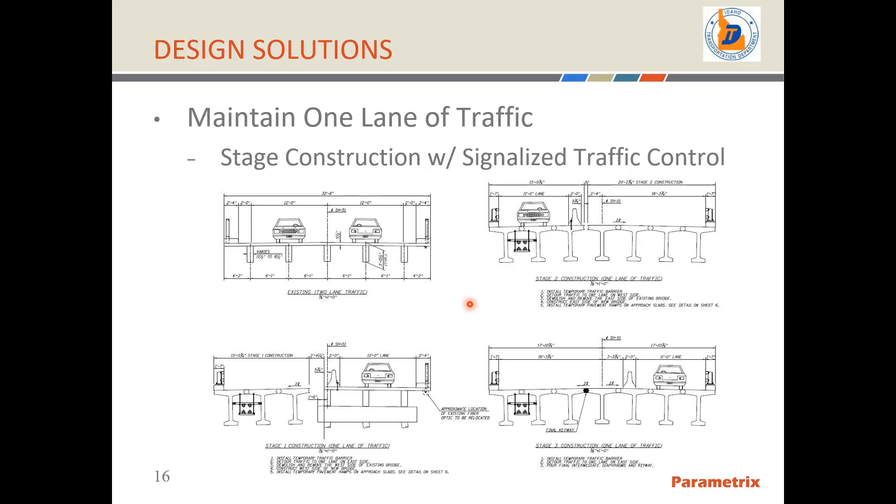There was a question that came in beforehand about slide 29. Can you discuss the details of the girder and deck longitudinal connections over the piers? You discussed this pretty thoroughly already, I don't know if you want to add anything. I think I covered this one pretty good.

Next question: how did the contractor attach the form tops to the deck to prevent flow out of the UHPC, on the top and bottom of the deck? I'd have to get back to that one and pull open the submittals, I don't remember the exact method he used. Typically, in the bottom of the top slab of the deck bulb T, we have the precaster put inserts in to attach the plywood form on the bottom, and it's a similar attachment for the top form as well.

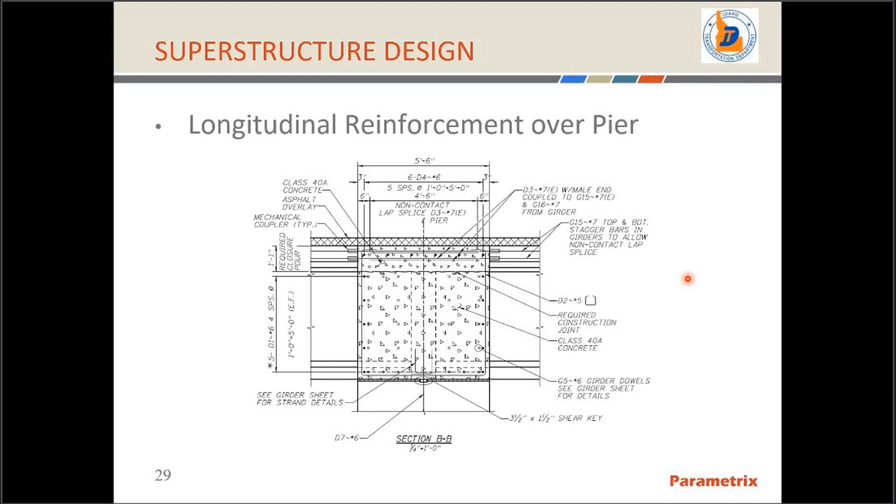Next, how are the piles in the splash zone protected from corrosion? I think you kind of mentioned this. Was that on the inside too? No, it was only on the outside.

They asked beforehand: can you provide information on the design and construction of the pile bents, and were there any considerations for long-term corrosion? I think you've covered that pretty well in your description of the pile and the zinc protection, so we'll go on from that one.

Let's look at another one on the piles. Could you discuss the choice of steel versus pre-stressed piles in the bents? Were there any subsurface obstructions that required pre-boring or exploration? No, there was nothing below surface anticipated that would require pre-boring to install piles. No consideration was really given to pre-stressed piles.

Matt, correct me if I'm wrong, but pre-stressed piles isn't something typically used in Idaho. I'm not even sure the local fabricators have the ability to fabricate those. Is that correct? Yes, that's correct. We don't have experience with using precast piles in Idaho.

A couple questions on construction came in beforehand. Can you discuss the delivery time and temperatures for ultra high performance concrete, and was the UHPC batched on site? The UHPC was batched on site. What the temperature was on the days they were placed, I don't know, I don't have those records. But there is a requirement that if you've got cold weather, you still have to treat it kind of like cold weather concreting.

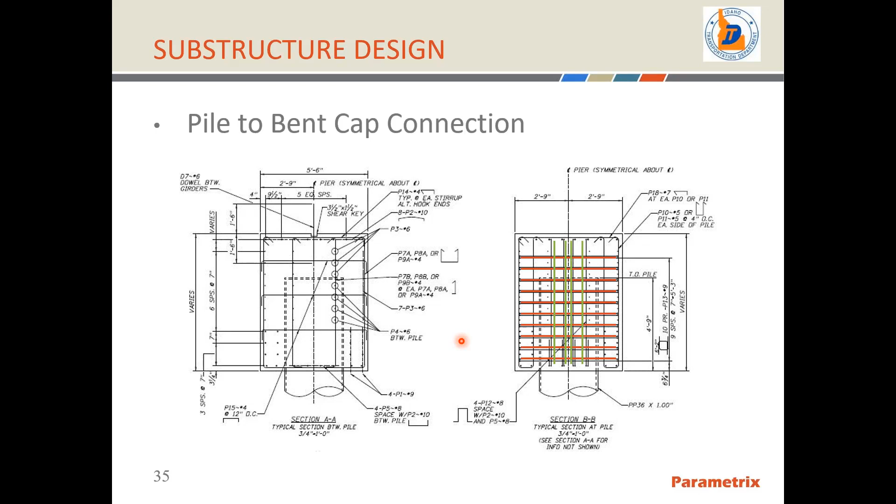There was a question related to the leveling correction. Did you check the stresses that were induced because of the deflection? So the equalization of the girder cambers, the stresses, historically those don't get checked in Idaho. Those typically are assumed that once the system is all connected and composite, it kind of counterbalances each other out and they act as a unit anyways. Matt, if I've said anything wrong here, please weigh in. But specifically on this project, we didn't do stress checks for the camber equalization. Well, it's a good question, and we have checked those in the past and made sure that we weren't exceeding any kind of tensile cracking stress when we do that.

Okay. There was a question about the pre-stressing strands. Were they epoxy coated? No, they were not. How long were the pipe piles? So embedded below the stream bed, they were about 55 to 60 feet, and then you got another 30 some feet above that. So yeah, they're about 70 feet. Oh sorry, 60 feet in, and then another 30 feet above that, so you have about 90 feet total length.

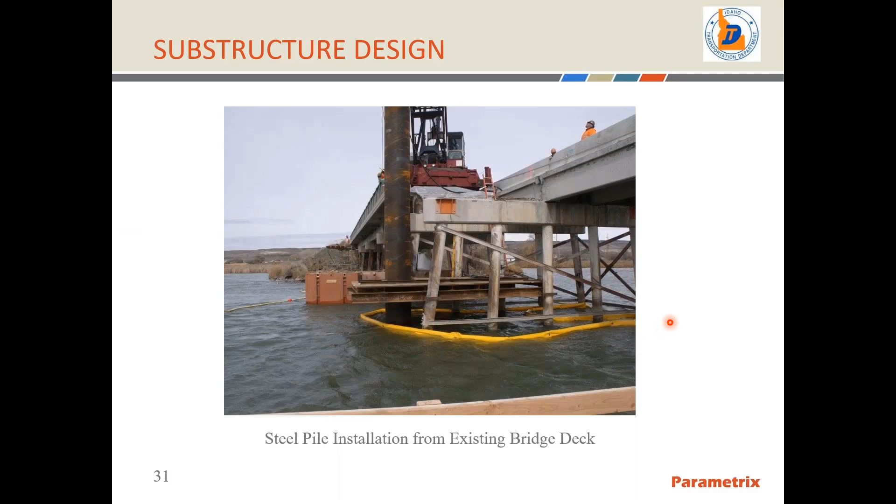Okay, there's a question about welding the top plate to the top of the 36-inch piles. Is that a common detail to Idaho or the structural engineer or the geotechnical engineers? It's common to me. I've used it many times when I'm trying to reduce the weight of pile, if you're having a situation where your foundations are limited for axial capacity. So there is a top plate right here, a little fillet weld around the top. The top plate was actually reduced to be 1 inch less than the outside diameter of the pile itself, so that you had a fillet weld right there. This plate doesn't really do much except stop concrete from filling into the pile and make sure that it transfers bearing load on top of the pile to the pile. So laterally and stuff, there's really no load to the weld.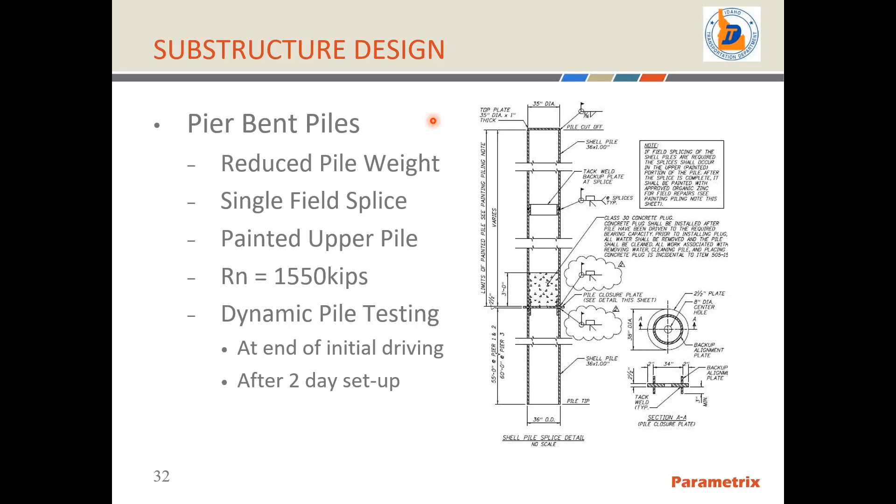Okay, what design case controlled the bent cap design? Specifically about the bent cap itself. So of course we checked for the dead and live load on the bent cap. We definitely had strength limit states control, but we also imposed those plastic moments from the pile to make sure that the reinforcement in the cap was adequate to take and transfer that load from the pile into the concrete also. So which one controlled? Vertically, the strength limit state did, but laterally, that plastic moment on the piles controlled.